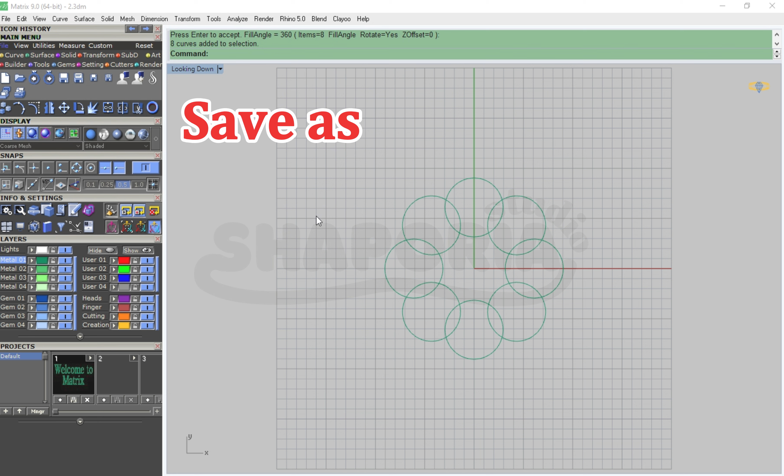Always save your work throughout the design process. Matrix Gold can sometimes crash unexpectedly, and losing hours of work is the last thing you want. Use version saves like ring_v1, ring_v2, and so on, so you always have a backup to go back to.

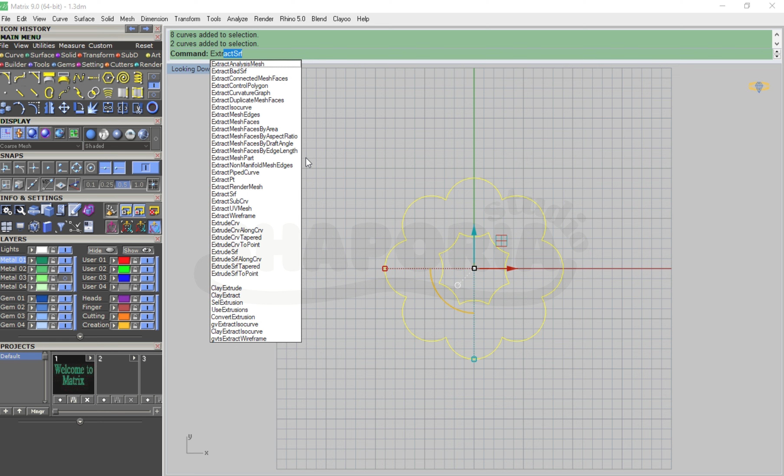Use layers to keep your design clean and organized. Separate gemstones, guides, shanks, and settings into different layers. This makes it easier to isolate, hide, or adjust elements at any stage of the process, especially when rendering or exporting your file.

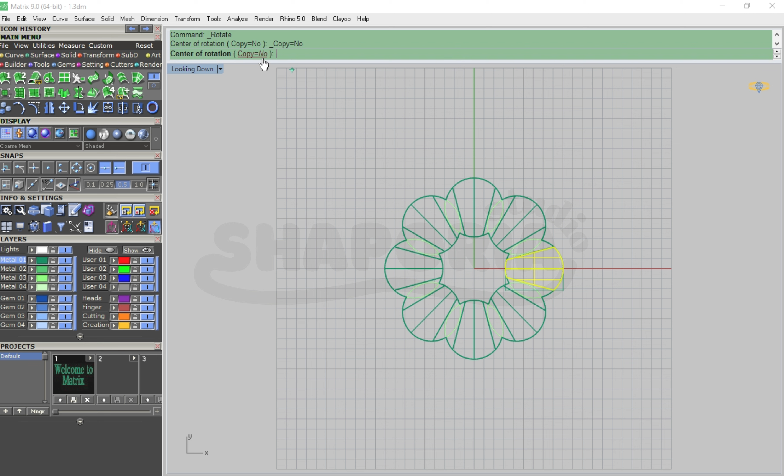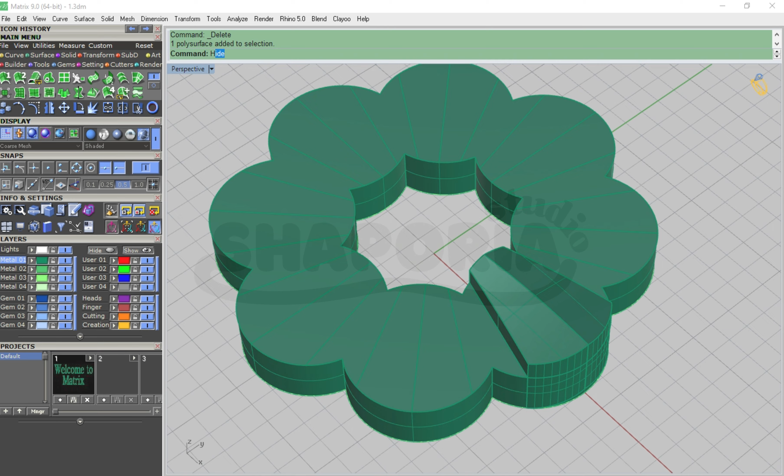Whenever possible, build your models with History or Smart Flow. This gives you the power to go back and edit dimensions or forms without starting from scratch. It's a huge time saver, especially for personalized or repeat designs.